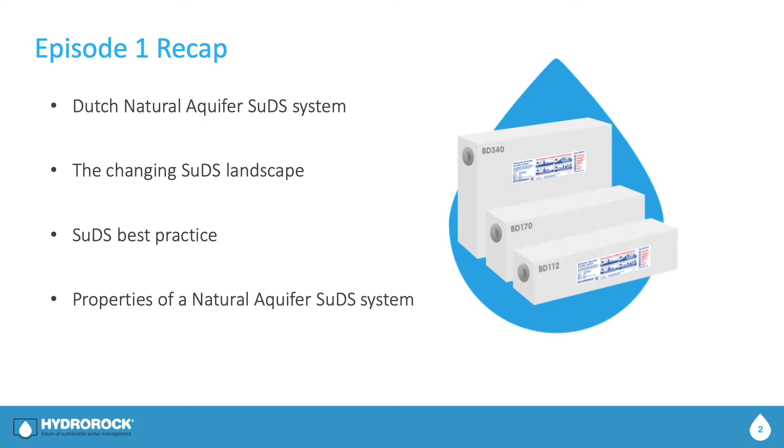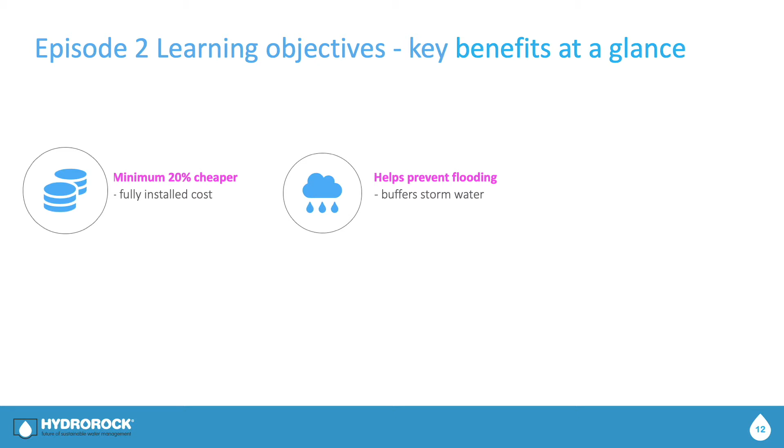In this episode, we shall be examining the key features and benefits of natural aquifer SuDS, understanding what makes them the most cost-effective, most efficient and greenest SuDS solutions. Let us begin with a quick overview of the 6 primary benefits of natural aquifer SuDS. Fully installed cost is a minimum 20% cheaper over any available alternatives. Flooding is prevented through highly efficient buffering of storm water runoff. It is truly green, made from a totally natural material that is completely recyclable.

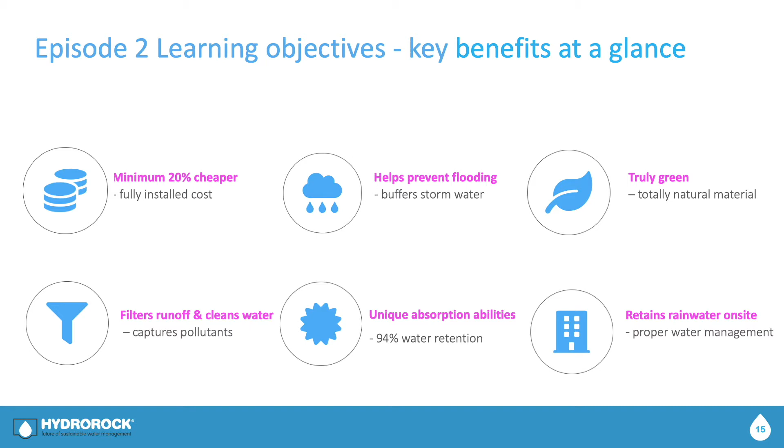Efficiently filters road surface runoff, cleaning up particulate matter, chemical pollutants and metals. Holds 94% water, creating highly absorbent natural aquifers wherever they are needed. Enables proper stewardship of rainwater by utilising proper on-site water management techniques. Firstly, natural aquifer SuDS comprises a highly effective 3-phase filtering system.

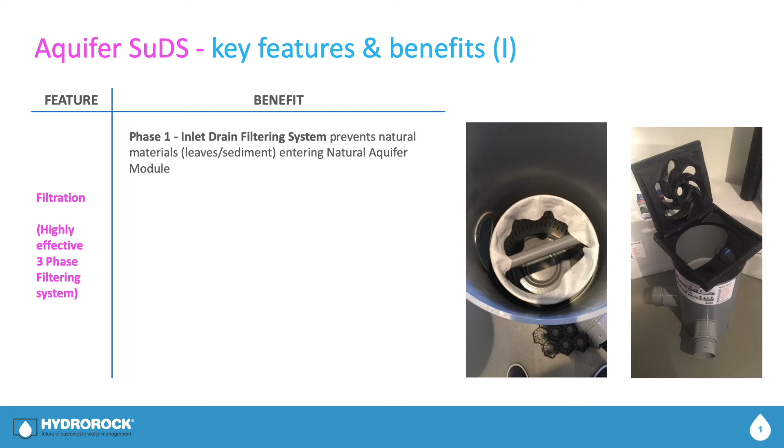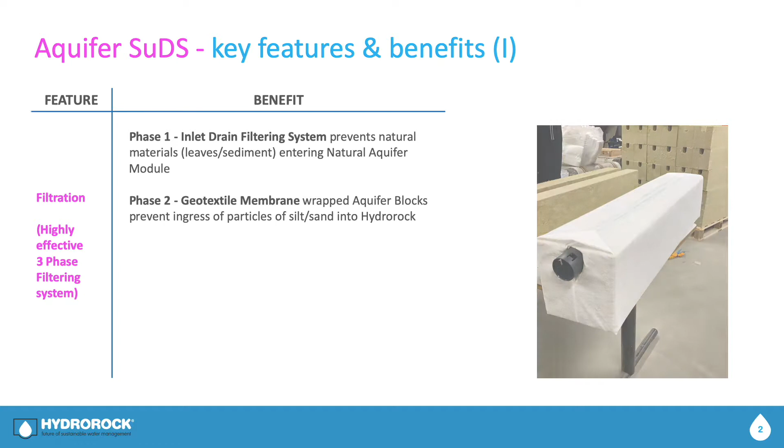Phase 1 uses the Hydrorock Inlet Drains removable filter unit to prevent natural materials like leaves and sediment from entering the natural aquifer module. Phase 2 uses geotextile material wrapped around aquifer blocks to prevent ingress of particles of silt and sand into the Hydrorock mineral wool. Phase 3 uses the natural ability of the Hydrorock mineral wool to filter road runoff, greatly reducing pollutants entering soil and watercourses, making it the best choice for environmentally friendly natural SuDS systems.

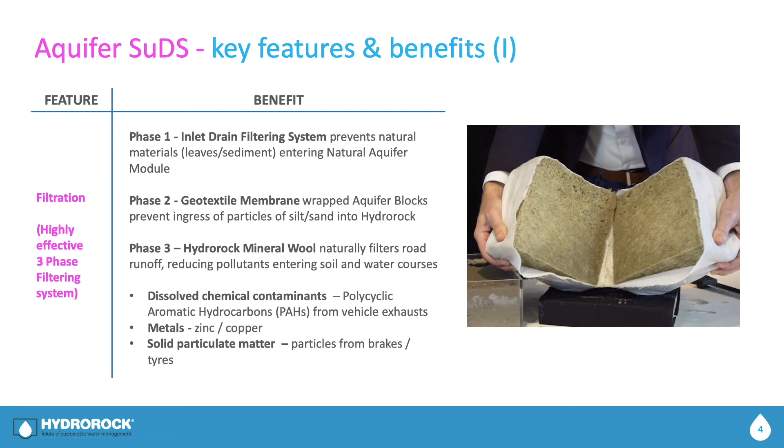Such pollutants include dissolved chemical contaminants such as polycyclic aromatic hydrocarbons, PAHs, from car exhausts, heavy metals such as zinc and copper, and solid particulate matter produced by abrasion of moving parts such as brakes, clutches and tyres.

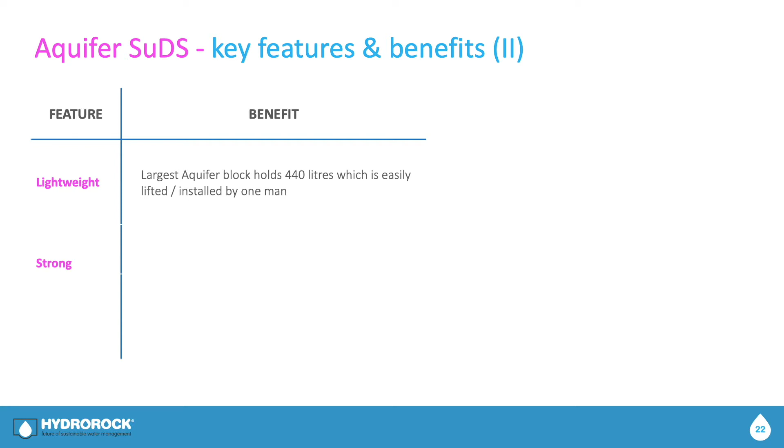Following on, 2 key features of the aquifer blocks are that they are both lightweight and strong. Aquifer blocks come in 2 densities: standard density Hydrorock weighing 75 kilograms per cubic metre and high density weighing 120 kilograms per cubic metre. Their lightweight nature means that even the largest aquifer block, capable of holding 440 litres of water, can be lifted and installed with ease by one man, making them very fast and simple to install by hand.

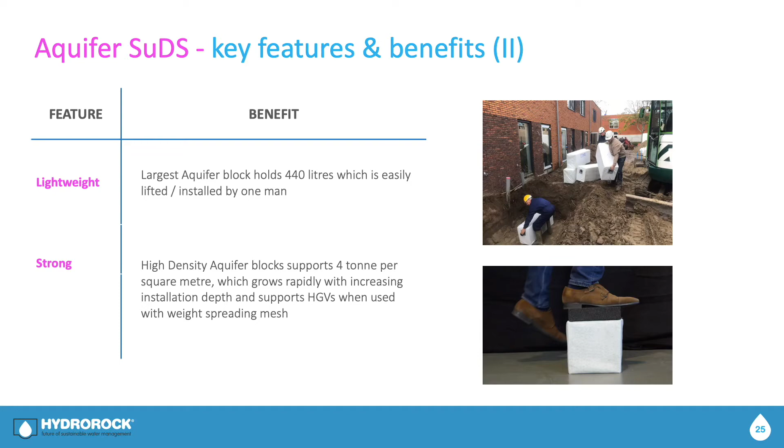Aquifer blocks are very strong. High-density Hydrorock can support 4 tonnes direct loading per square metre, and standard density Hydrorock can support 2 tonnes direct loading per square metre. Load carrying capacity grows rapidly with increasing installation depth. This means that high-density blocks with weight-spreading mesh installed 35 centimetres beneath the road surface can easily support the heaviest UK road vehicles. In most other non-highway situations, standard density aquifer blocks can support everything demanded of them.

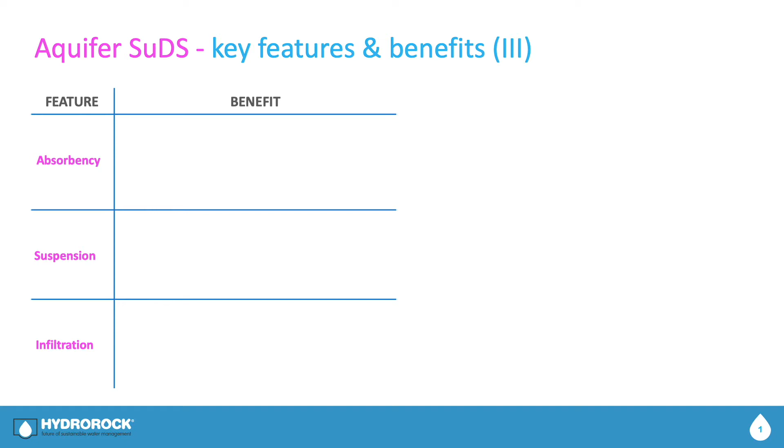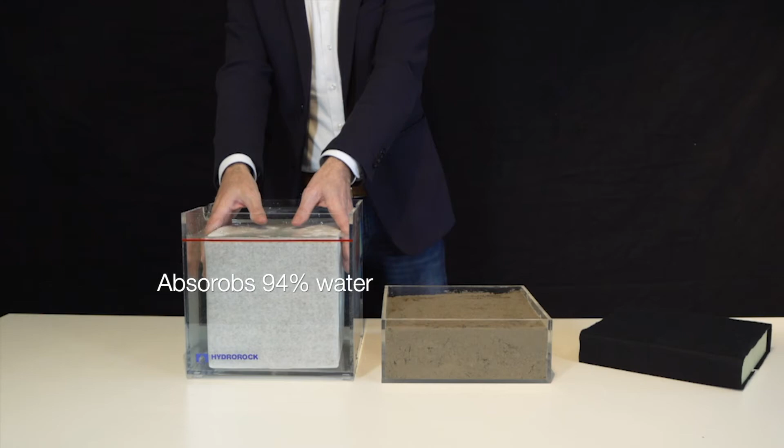Next, we're going to explore the aquifer block's absorbency, suspension and infiltration properties. We're now going to take a look at a short video that demonstrates these 3 unique critical properties of aquifer blocks. The first property is the high absorbency of aquifer blocks. Note the water level marked by the red line. Watch how rapidly the aquifer block absorbs water and the resulting water level barely moves above the red line. This is because aquifer blocks absorb 94% water of their cubic volume. Such high absorbency also means water moves freely between touching aquifer blocks, capable of travelling 200 metres through aquifer blocks within 24 hours.

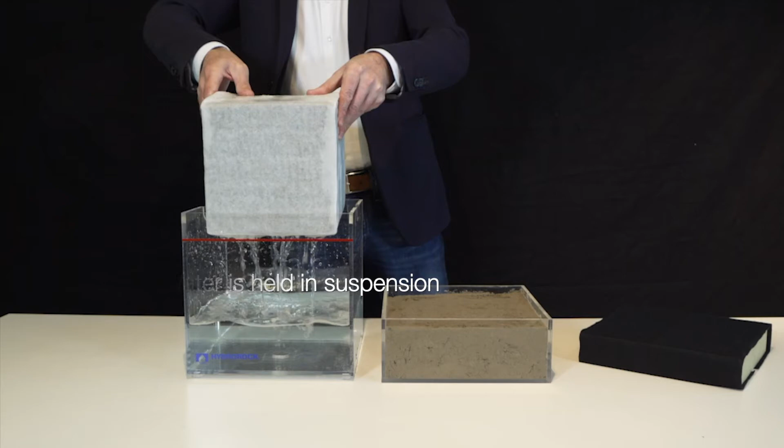The second property is the suspension of water within aquifer blocks. Watch as the aquifer block is lifted out of the water. Note how far the water level drops. This is because the water held is suspended in the capillaries between the mineral wool fibres. Suspension of the weight of the water means that there is very low hydrostatic pressure on the soil beneath the bottom of the aquifer block, preventing soil compression.

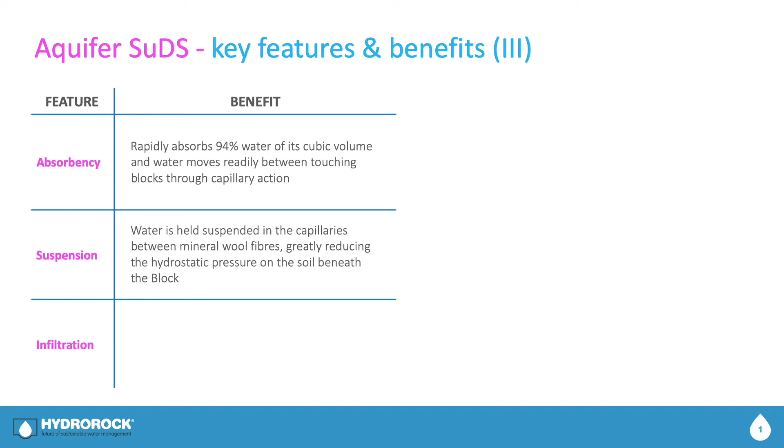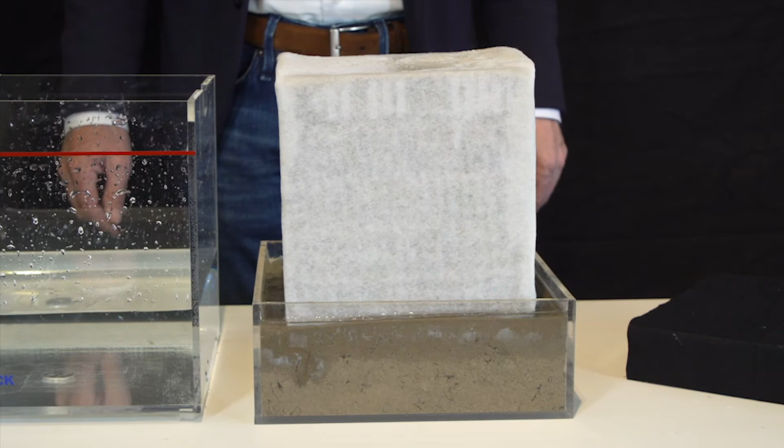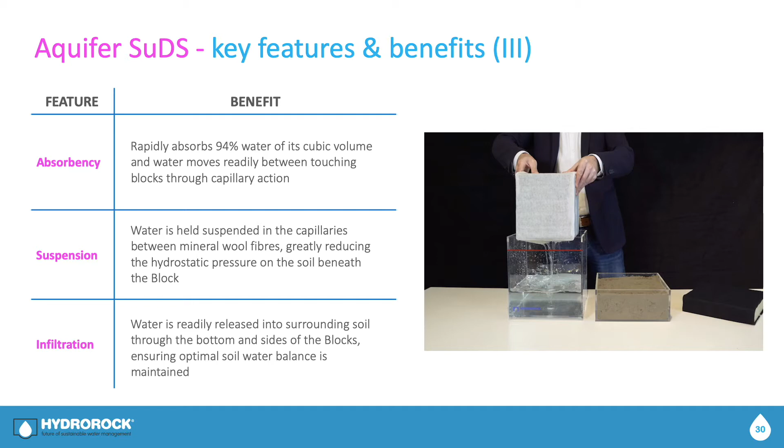Finally, the third property is the infiltration efficiency. By preventing soil compression under the aquifer blocks, infiltration is enabled across both the bottom and the sides of the aquifer blocks. Watch how readily the water infiltrates into the sand beneath the aquifer block. The combination of these three unique capabilities make Natural Aquifer Block SuDS the most highly efficient infiltration system available.

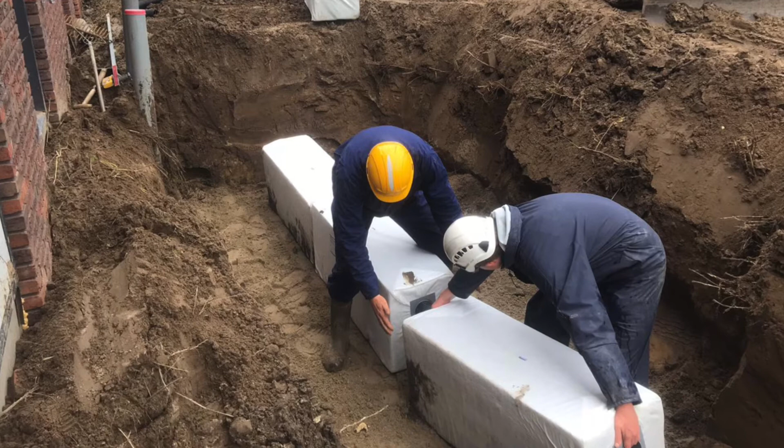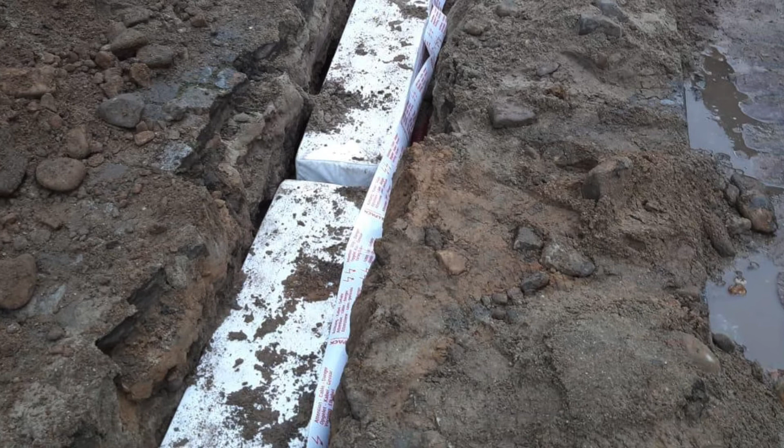Now let's look at the installation and lifelong reliability features of the aquifer blocks. Natural Aquifer SuDS is essentially a non-engineered solution. The Aquifer SuDS system was deliberately created to make installation simple, quick and easy, avoiding any need for specialist skills, equipment or tools. Trenches only need to be 5 centimetres wider on each side than the aquifer blocks, minimising excavation, backfill and removal of spoil. This also has the benefit of allowing blocks to be placed in small, narrow areas.

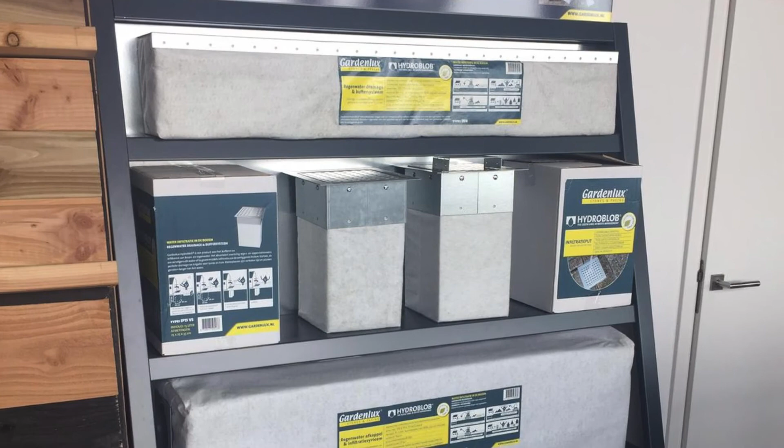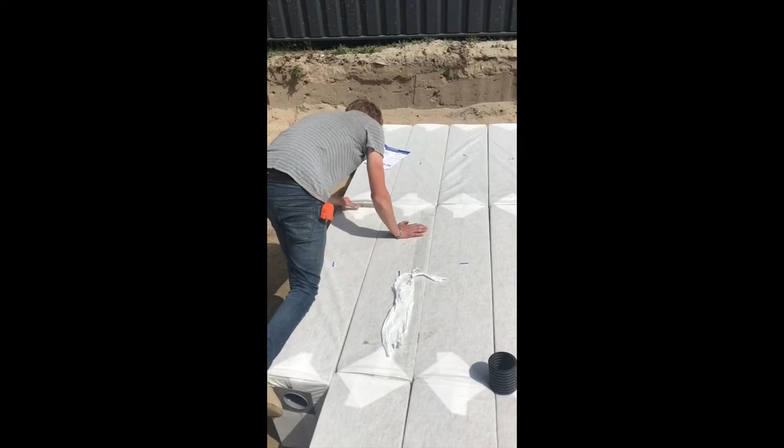Aquifer blocks come ready for immediate use, individually pre-wrapped in geotextile membrane. They're simply placed on the bottom of the trench on top of a thin layer of sand, connected in seconds using snap-together fittings, then immediately backfilled. This makes Natural Aquifer SuDS the ultimate plug-and-play system, saving a minimum of 50% installation time over any alternative.

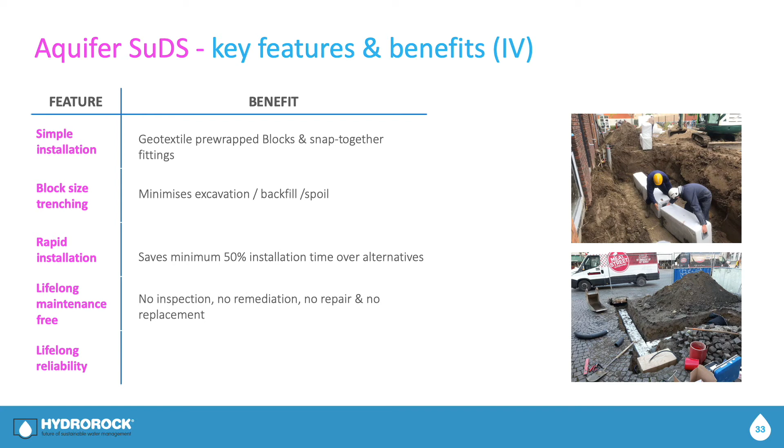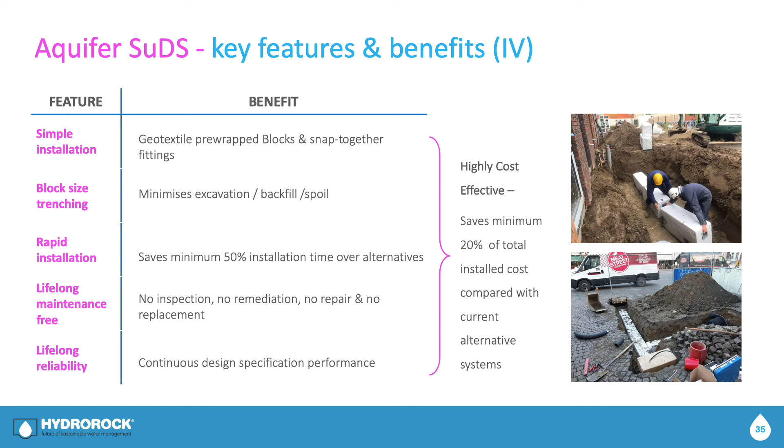Aquifer blocks provide lifelong maintenance-free operation, with no requirement for inspection, remediation, repair or replacement. They provide lifelong reliable operation at design specification performance. All this means Natural Aquifer SuDS systems are highly cost-effective, saving a minimum 20% of total installed cost compared with current alternative systems.

Another key feature of the Natural Aquifer SuDS is that it is a very simple modular system. The system comprises no more than 2 types of aquifer blocks in a range of sizes, with only 2 types of density and a few types of fittings. Yet these cleverly combine to provide endless scalability, configuration versatility and installation flexibility.

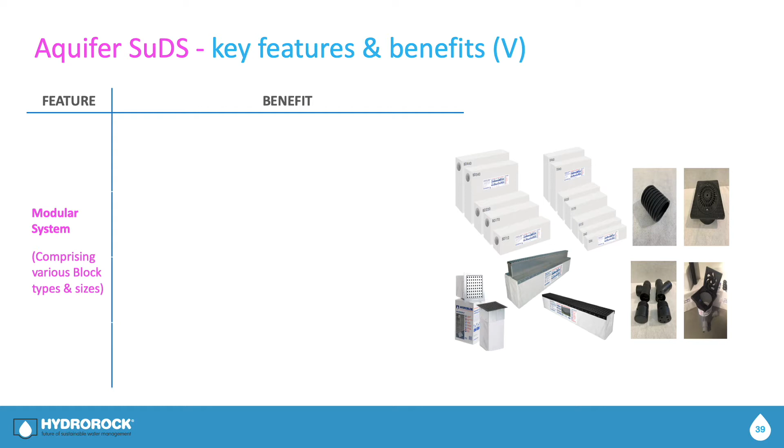Scalable from a few aquifer blocks used as a soakaway under a domestic flowerbed to dozens of blocks connected in modules, or even hundreds of blocks interconnected in multiple arrays for major civil engineering projects. Almost limitless configuration enables design of all manner of purpose-built systems, capable of providing optimised solutions for the specific operational requirements of projects and users.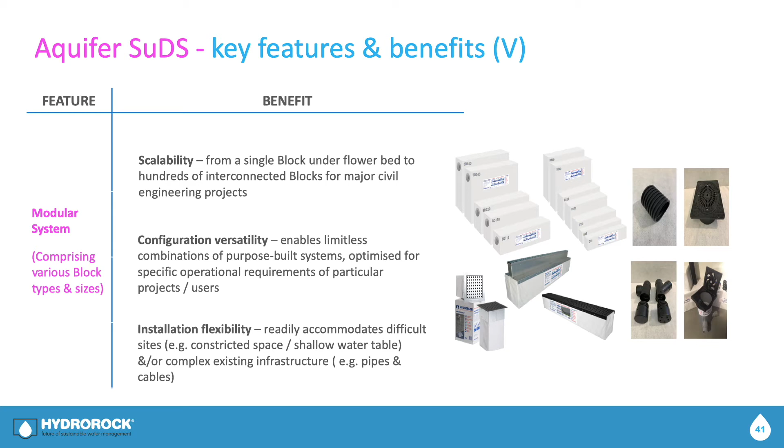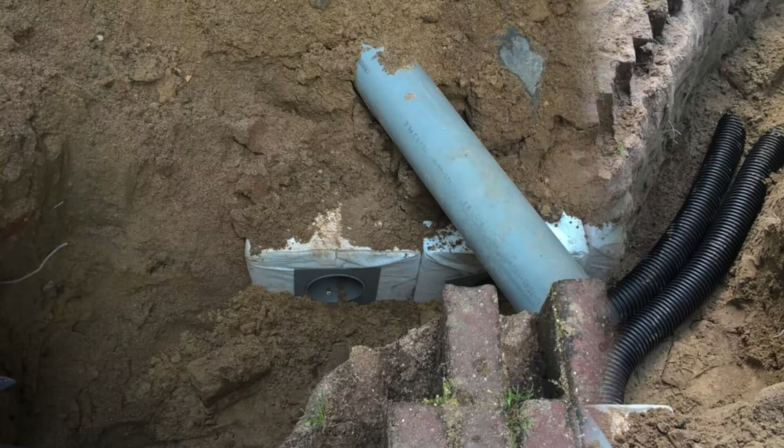Flexibility in installation enables ready accommodation for the most difficult and challenging of new build and retrofit sites, including those with limited access, constricted space, high water table and complex buried existing infrastructure such as pipes and cables.

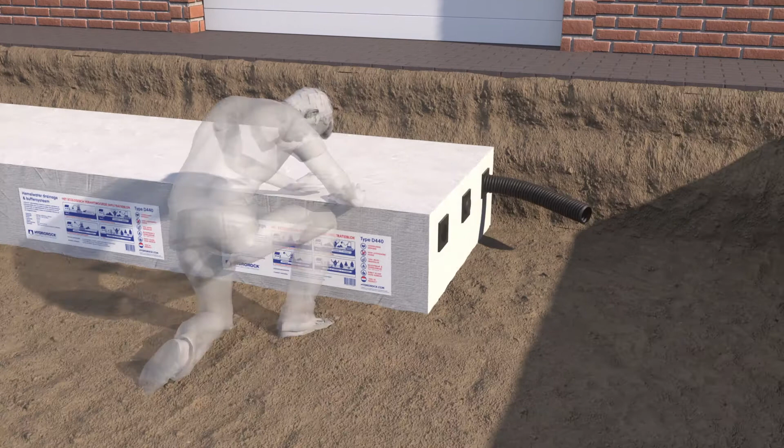Let's look at another unique key feature, the internal circulatory system. This video shows the assembly of an Aquifer SuDS module. The module is assembled from 3 columns of parallel touching, buffering and drainage aquifer blocks, each having a water circulation channel running through its length. The 2 outer columns are connected by 2 flexible pipes to the inlet drain, with a single flexible pipe connecting the 2 outer columns at the other end.

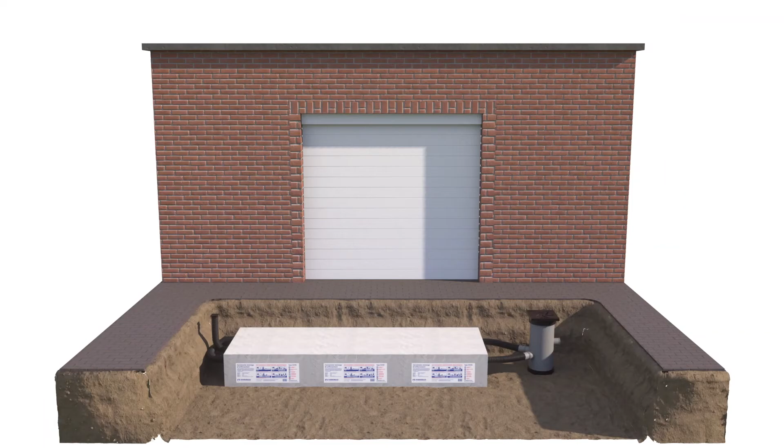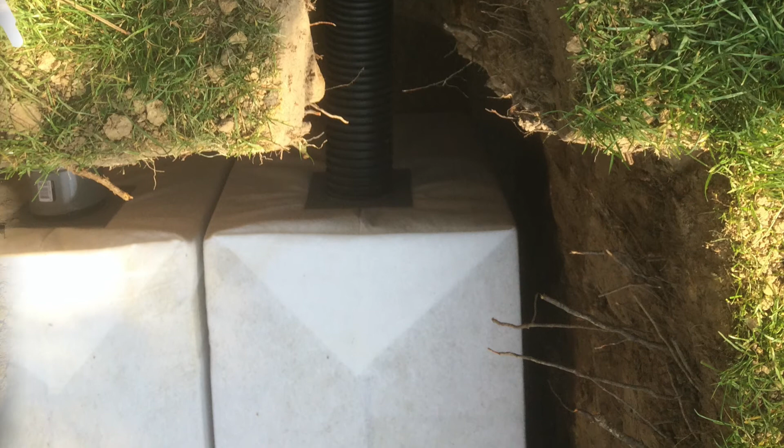This provides a looped circulation system, enabling the very fast water filling required to buffer a major 30-year rainfall event. Water soaking down into outer columns of aquifer blocks is rapidly absorbed into the centre column. Rapid water ingress into the module purges the 94% air from the aquifer blocks through a snorkel pipe connected from one end of the central column of blocks to surface vent.

The circulatory system is also designed to enable non-disruptive cleaning of the module's water circulation channels through the simple jetting of water by hosepipe around the system. This would only be necessary in the unlikely circumstance of the cleaning filter not being properly replaced into the inlet drain, which may enable leaves or some sediment to enter the module. In any case, the geotextile membrane wrapped around each aquifer block would ensure that they continued to operate properly.

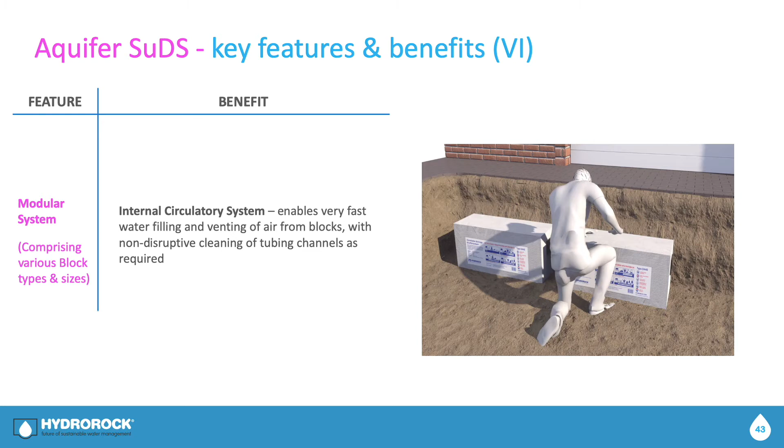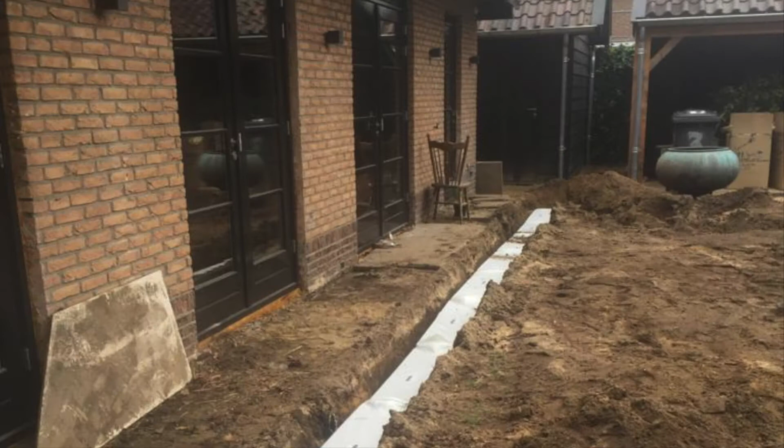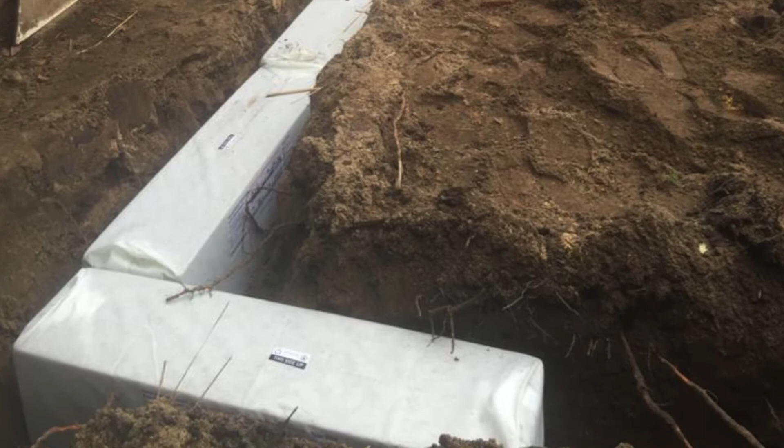Another unique feature of aquifer blocks is their ability to form a unitary aquifer. By this we mean 2 separate but touching aquifer blocks immediately and freely pass water between themselves, acting as a single unified aquifer. Similarly, 2 blocks placed apart but connected with a flexible pipe will also freely move water between themselves and act as a unitary aquifer. This capability provides 4 very valuable benefits.

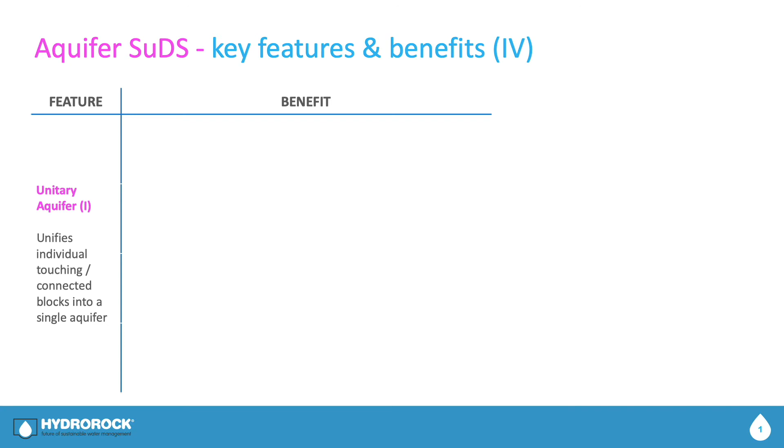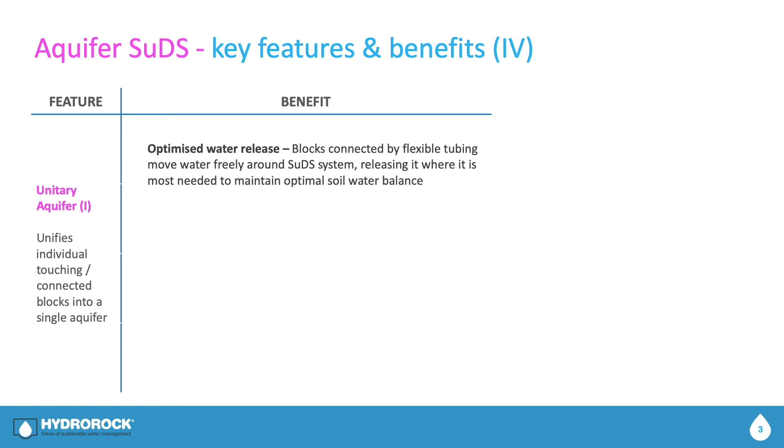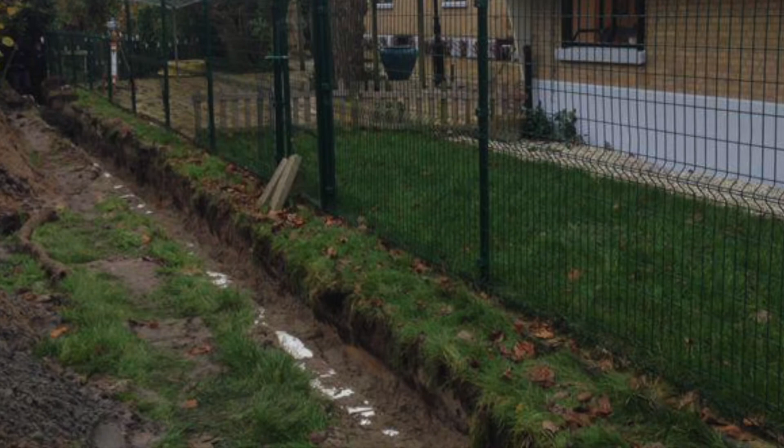First, aquifer blocks connected by flexible tubing readily convey water around the natural SuDS system over quite considerable distances if required, releasing it where the soil requires it most, thereby maintaining optimal soil-water balance across a wide area. Second, long lines of aquifer blocks can be used to drain unwanted surface and subsurface water in one place and transport it elsewhere on a site. These not only act as a conduit, but as part of the buffering capacity of the system and provide infiltration.

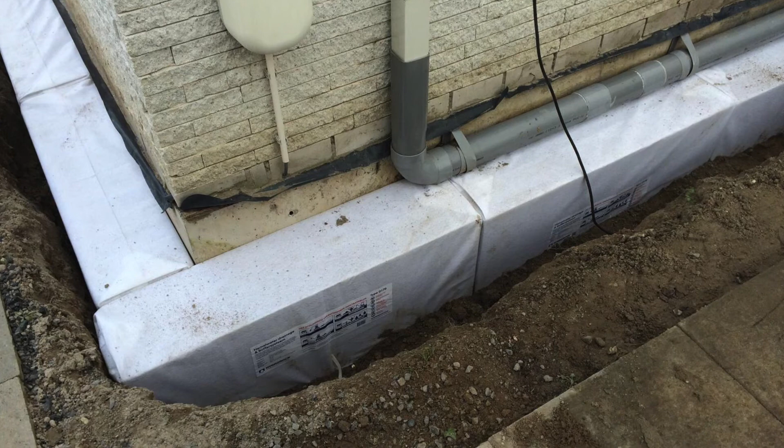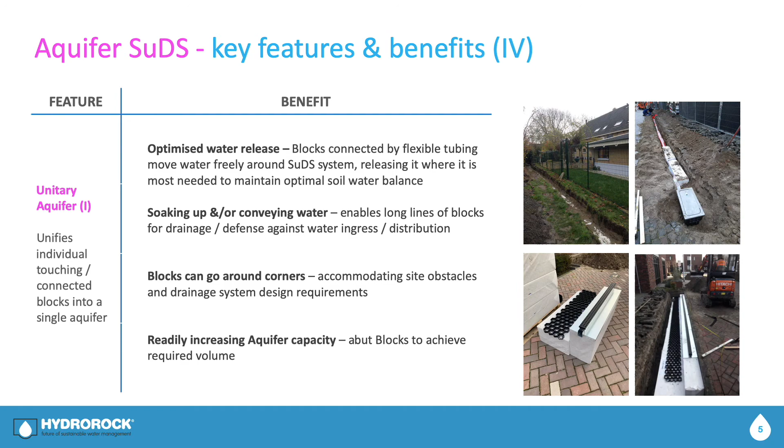Third, touching aquifer blocks can move water around corners. This enables natural SuDS drainage systems to readily accommodate difficult sites with unmovable existing obstacles. This is a significant benefit when retrofitting or when maximising the use of small spaces on a site that could not have been used for SuDS in the past. The fourth benefit comes from the ability to readily increase aquifer capacity to the desired volume by simply abutting additional or larger aquifer blocks. The ability of aquifer blocks to form a unitary aquifer has enabled the creation of ClaySolve.

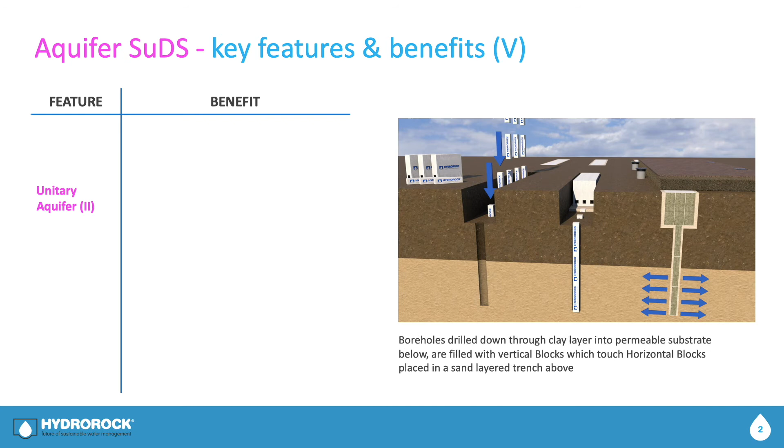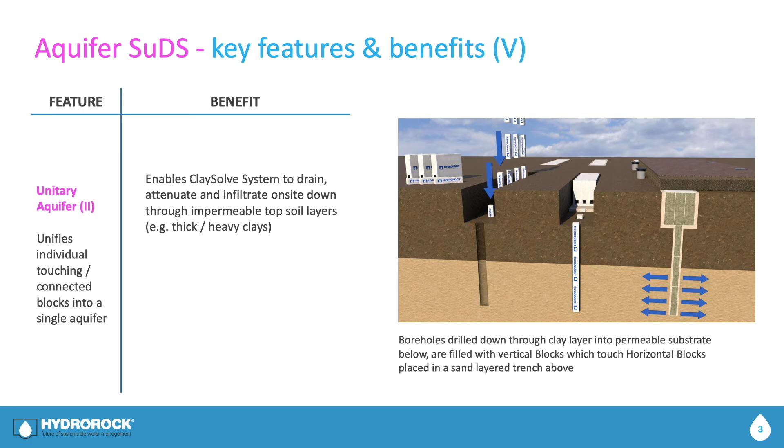ClaySolve is HydroRock's unique proprietary system for infiltrating through impermeable top layers, such as clay. ClaySolve uses boreholes down into the permeable substrate, filled with specially designed vertical aquifer blocks, to connect and form a unitary aquifer with horizontal aquifer blocks placed on a sand layer in a trench above. ClaySolve enables rainwater to be retained and responsibly managed on site, thereby mimicking nature and maintaining the natural water cycle.

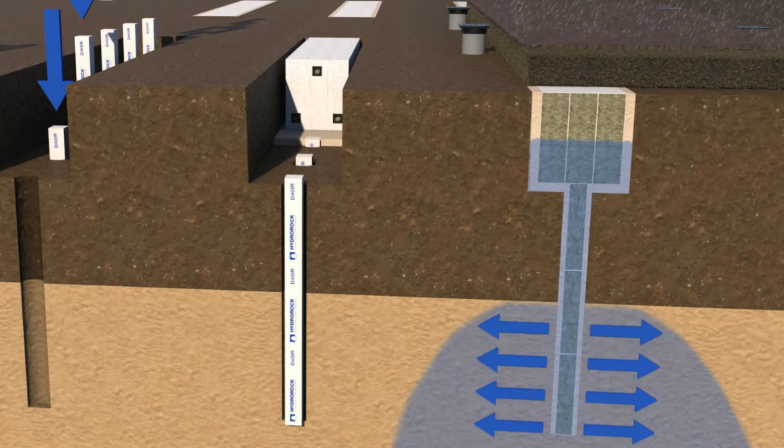The unique feature of aquifer blocks is that they are solid. Until now, the need for high-volume absorbency and rapid attenuation of stormwater meant installing large underground voids in the form of crated sumps. These voids required placement well away from buildings and created large construction exclusion zones on sites, as well as almost arid areas on the surface. This unique feature of aquifer blocks makes the need for underground voids unnecessary, while also providing 4 additional major benefits.

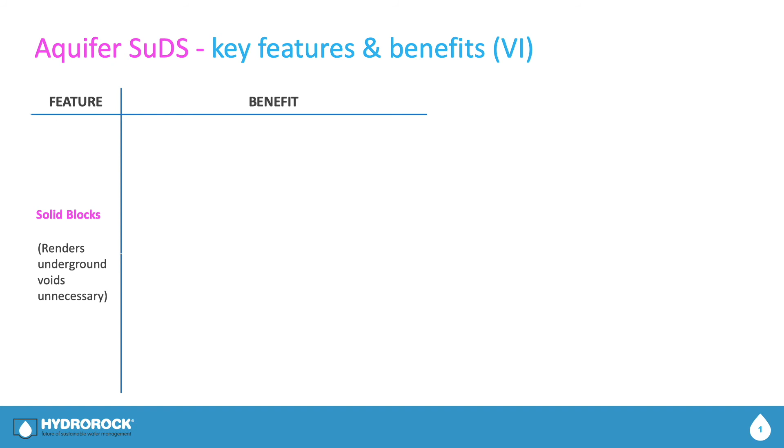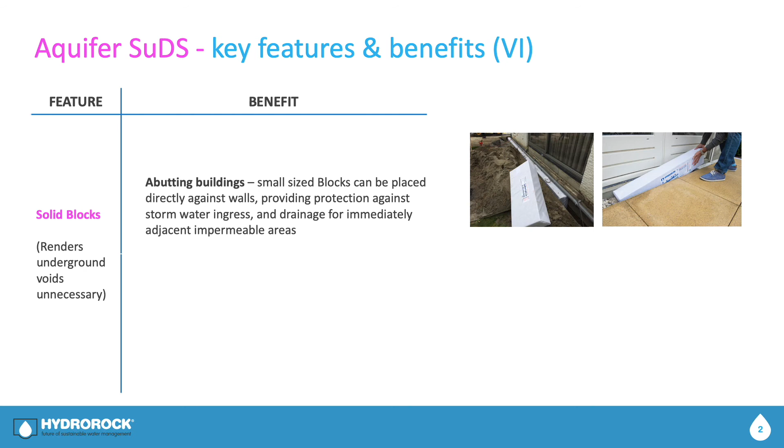First, smaller-sized aquifer blocks can be placed directly up against buildings, providing an excellent protection barrier against stormwater ingress from immediately adjacent impermeable areas such as patios. Second, large-size modules of aquifer blocks can be positioned within a few metres of buildings, far closer than current UK regulations allow for alternative systems involving underground voids.

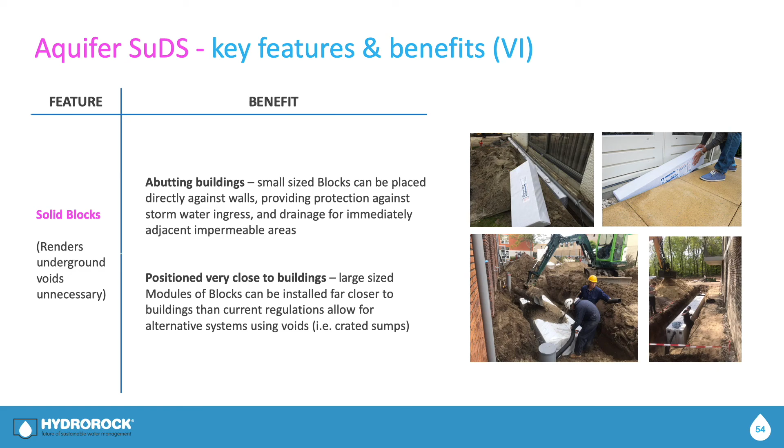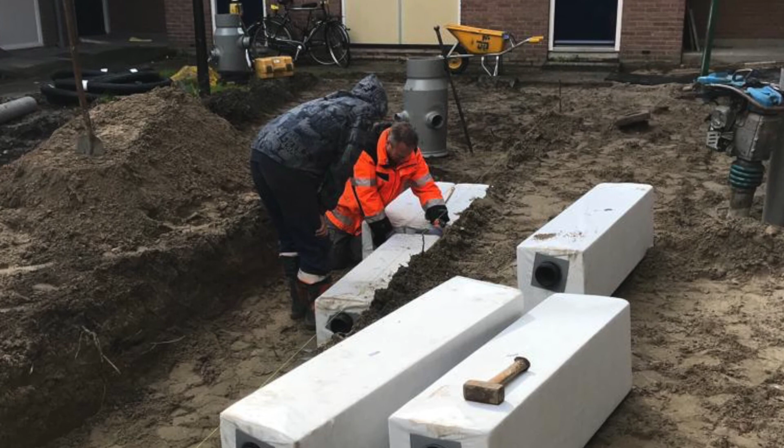Third, the removal of the need for large construction exclusion zones on sites enables optimisation of space for construction and simplification of the runs of underground drainage pipes. Fourth, the aquifer blocks keep the soil both on top and around the blocks in optimal water balance. No supersaturation or desiccation of the soil.

That brings us to a close of episode 2. Just to recap, in this episode we've explored many of the unique features and benefits of natural aquifer SuDS. The major advantages are a minimum 20% cheaper on overall installed cost, effectively buffers and infiltrates rainwater, truly green, made from mineral wool, even the labels are biodegradable, filters and cleans runoff water, unique water absorption and retention qualities, retains and infiltrates water on site due to its modularity.

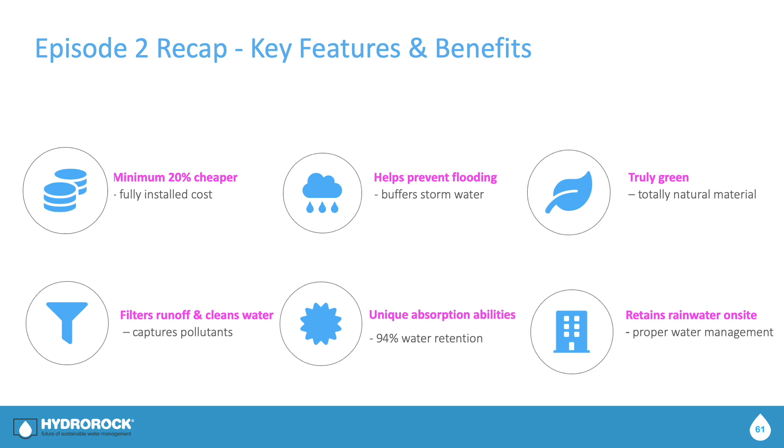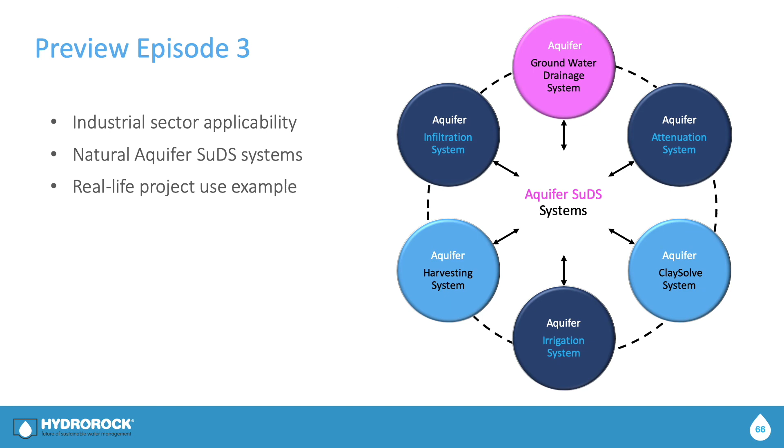Join us in episode 3, where we will be looking at industrial sector applicability of natural aquifer SuDS, exploring a few of the different natural aquifer SuDS systems and looking at some real-life examples of uses within projects, including attenuation, infiltration, ClaySolve, drainage, rainwater harvesting and irrigation.